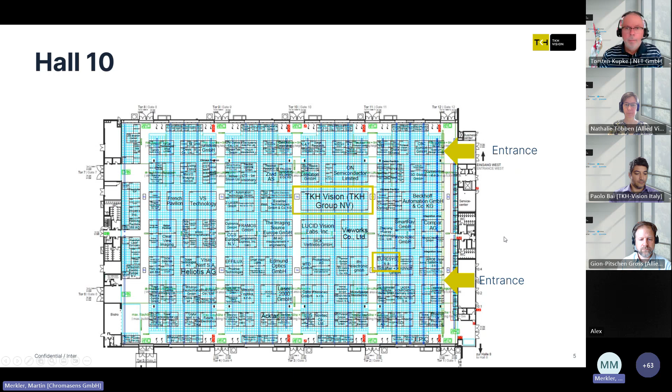As information, what we have in hall 8 - there are some other companies like Basler and Dalsa. The show tried to split the large companies in a quite similar way between both halls. What we also have in hall 8 is the Vision Days stage from the VDMA for the central presentations.

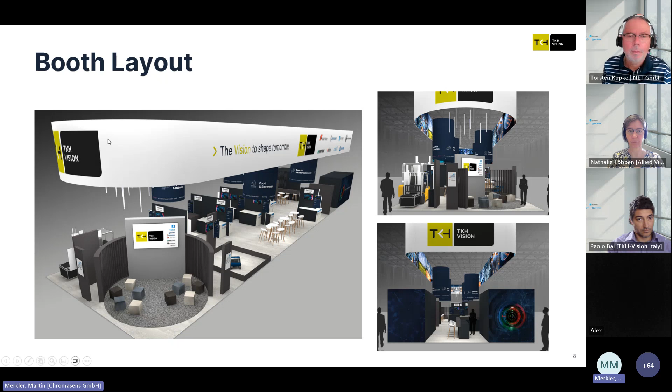What do we have on our booth? So here are first some impressions about the shape of the booth, about the color appearance. What you see here in front is a new thing we have this year - the first time we will have our own speakers corner on the booth, where we will have some really nice presentations. Nathalie will tell you something more later on. Please don't take care about the headline, because that visualization was done before we had the final headline for the show.

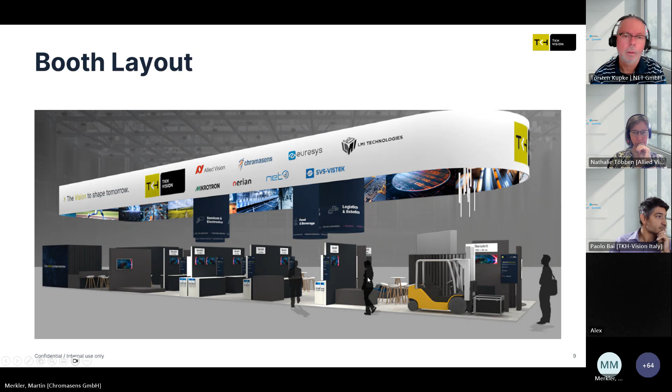Also some really nice eye-catcher demos, like the remote controlled forklift from the partner Enable, equipped with Allied cameras. And yeah, that's the shape of the booth.

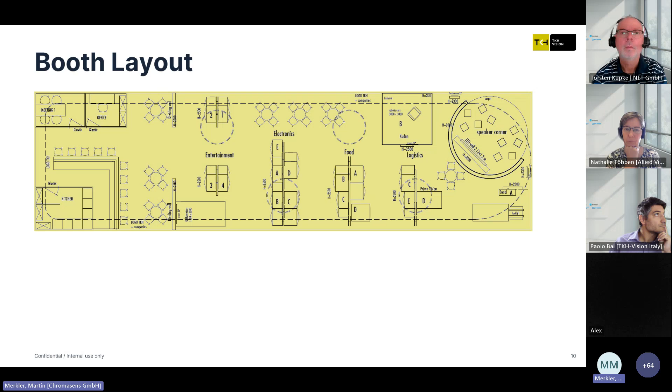On the right hand side we have the entrances from the hall, first beginning with the speakers corner. This time, as you remember, last years each company had its own tables and its own space. This time we changed to an approach organized by markets and segments - so we sorted what we want to provide not by the companies, but by the segments.

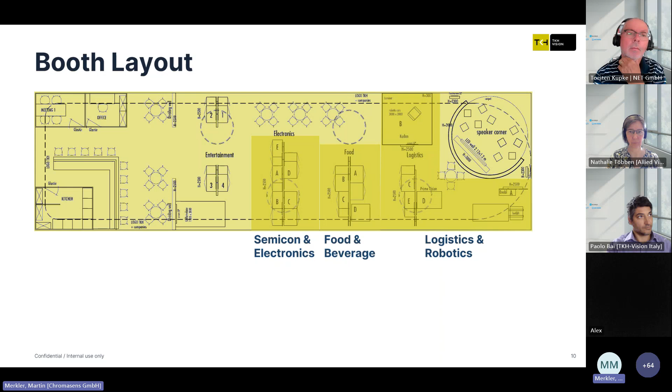For example, we are starting with logistics and robotics. The next segment we have is food and beverage. The third segment is semicon and electronics. And the last but not least segment is sports and entertainment.

On the sports and entertainment segment, we have also a really nice eye-catching - it's not a demo, it's a challenge for visitors - a golf challenge with a ball and holes, to have some fun putting.

And we have some special segments. We have the TKH Vision Solutions with an application sample we did the last years together within the group - a really challenging application. There we are showcasing what we can do together as a group, showing customers the advantages of a group and not only the single companies. Also what we have here is the TKH artificial intelligence demos, where we have integrated TKH AI solutions into the demos of the single companies.

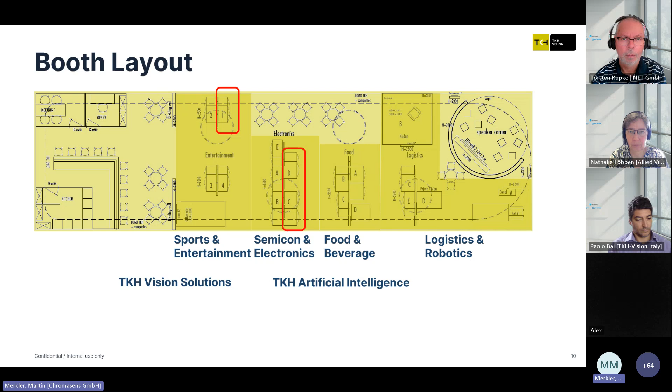That's the segments with the demos and the company. What we also have on the booth are 2 meeting rooms - small ones for approximately 4 people directly on the booth, and a larger room at the entrance of hall 10 for up to 12 to 14 people. We have a reservation list, so if you need a meeting room for you and your customers, please let the Vision Show team know. We will check what is available and do the reservation for you.

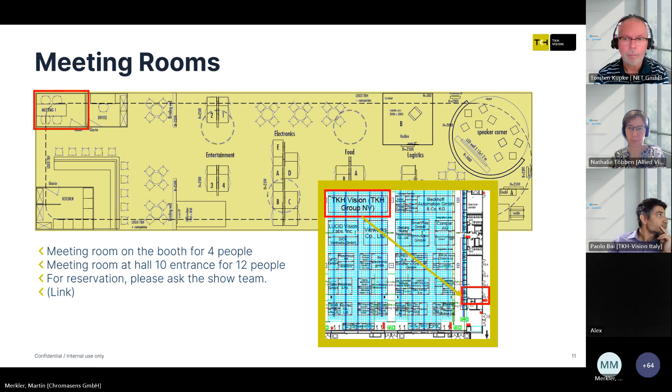Also quite important, infrastructure. We have a small office on the booth, intended for storing only the laptop bags, no regular luggage. We have a kitchen for the catering, and outside in the loading bay at gate 11, here is the TKH Vision booth, and here is the loading bay. At gate 11, we have an office container where we can store materials where we don't have the space on the booth.

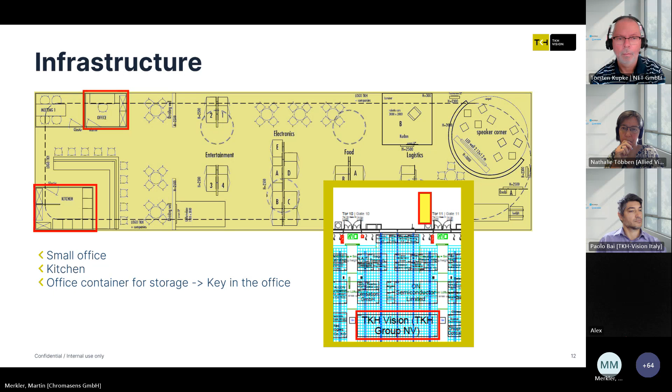And yeah, communication. Nathalie, now it's your turn.

That combines the communication with the booth design. The booth design really reflects very well our different levels of communication. Our communication approach, above all and most visible, is the TKH Vision level and message. Then the next level is the segments, the focus segments Martin has already shown, and typical applications for machine vision users. Then the next level is the brands, a member brand of TKH Vision.

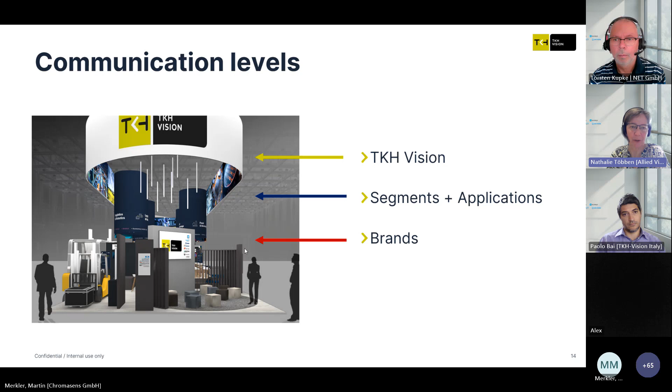Could you please go on, Martin? So that's the TKH Vision level, the message, and the new or actual slogan, United Power for Your Vision Solution. And the main message is that TKH Vision is really focusing on the customer and providing customer oriented vision-based 2D and 3D components and solutions.

It's not a new story, we just continue the story we've already started some years ago. So we still have the same key visual, and what is new is that all the OpCo logos don't have their own tagline anymore, but we have this general tagline, the TKH Vision brand. But as we are now shown together with TKH Vision, we will use the brand logos without the tagline. And for the first time, we will also have two new logos on our booth.

That is the TKH Vision Solutions logo and the TKH Artificial Intelligence logo on the demo desks in the area Martin has already shown.

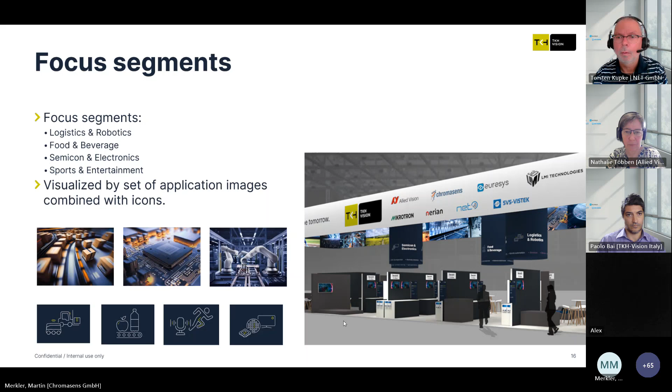We've also created icons for each segment, which are used on different spots on the booth. Then the next level, we've already seen that, is the repetition of the areas for the segments.

Next level is the applications. We want to highlight the type of applications we have, and they are very visible on the segment banner and on the demo desk, where we have a detailed explanation and description about what the demo is about, what application task is shown, and which company and which component is involved and integrated into this demo.

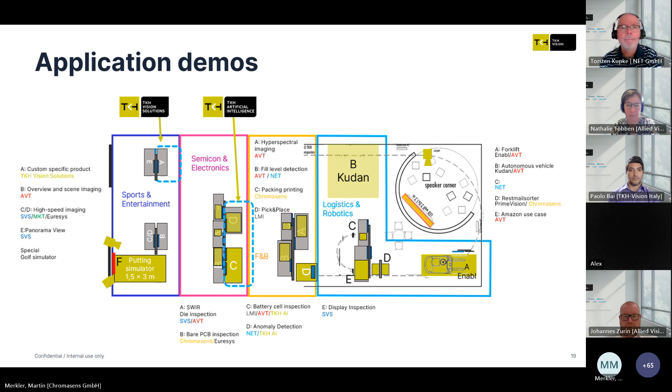There you can see the repetition of the demos for the segments, but you will learn more about this in detail tomorrow within the segment presentations. Here are some demo desk examples, how they would look like, but I think you will see more tomorrow.

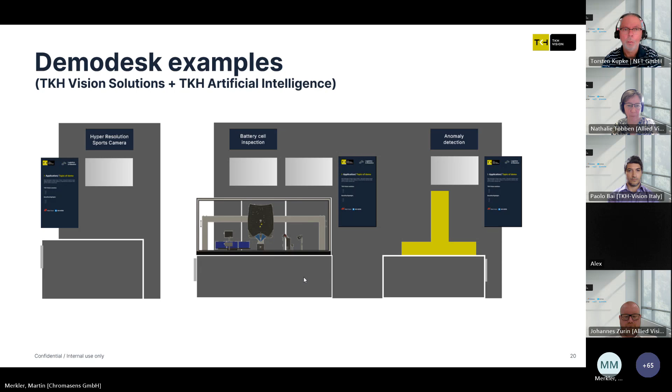And then we have our TKH Vision brands, and they are also still very present on our booth, on the banner, on the graphic panel for the demos where the OpCos are involved, on the speaker corner, so they are still quite visible on the booth.

So that's the first thing about the communication. Now some more practical, but quite important things: service and catering. We have some meeting areas where you can sit together with your visitors and customers. We have some high tables with chairs here at the demo segments, and we have the catering area also with the high tables, and a really nice large bar.

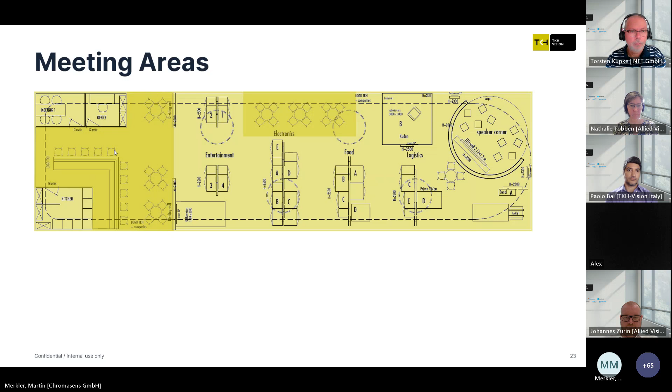And what do we have? Yes, we have a barista on the booth, the same as 2 years ago. On the image you see the son of him, he will be on our booth.

What do we have for food and drinks? We will have mineral water with and without gas, Coke, orange juice and apple juice. And for the evening, we will also have some beer, but it's the evening beer.

For food, we will have sandwiches, open sandwiches, and finger food with and without meat, some with fish, something for everyone. And we will also have 3 people from a service team who will help us provide the catering to you and your customers.

Yes, and also important, we have some rules you should take care about.

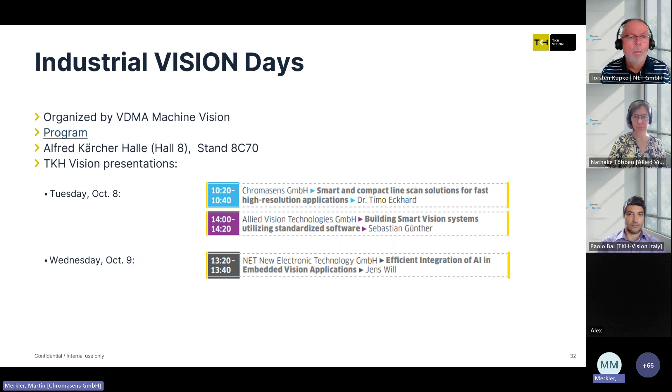Also organized by Ronald Müller, there are guided tours each day. We are part of this tour for the logistics segment, and on Tuesday and Thursday we are part of the electronics and semiconductor tours. There they offer guests taking part in the tour a breakfast, some introduction, and then tours through the different booths.

We should really take care to give a good presentation for these guided tours.

Oh, and a new thing on our own booth is the speakers corner. Nathalie, could you take over again?

We will have the speaker corner on the most important or most frequented side of the booth, and we put together quite an interesting and huge program with different speeches. We will start every day with a welcome to TKH Vision presentation. The idea is to have a kind of interview, not a pure presentation. We'll see the program in detail afterwards, but I want to highlight the keynote speeches. Every day after our break, we have a keynote.

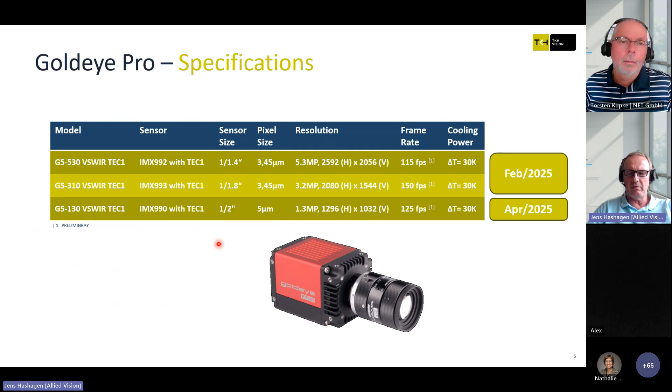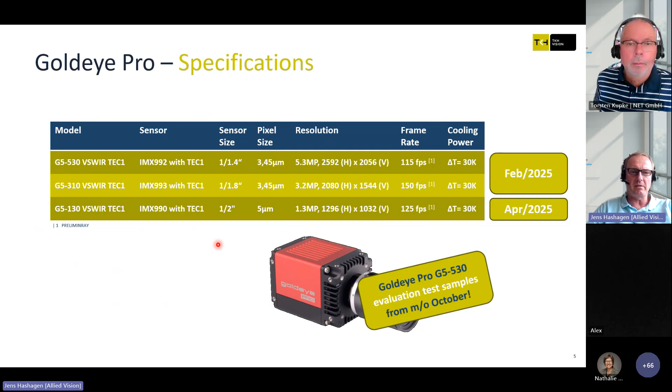This slide provides an overview of the already scheduled models. We start with the 5 and 3 megapixel cameras, which will be available or released in February. We will also integrate the first generation 1.3 megapixel sensor, released with a feature update in April next year. Right after the Vision Show, the first GoldEye Pro models with the 5 megapixel sensor will be available for customer testing.

A few words on the mechanics. As you can see here, the GoldEye Pro has more or less the same mechanical dimensions as the previous GoldEye, so 55 by 55 and a length of 78 millimeters in housing. The mounting holes are at the same positions, as well as the tripod adapter, which is on the bottom. This also ensures that replacement of GoldEye cameras by more modern GoldEye Pro cameras is easily possible.

A few changes we have here versus the GoldEye: the connectors are at different positions, as you can see here. The label is a little bit larger. The LED is at a different position, and the red part of the housing is a little bit lower than in the first generation. We have a flattened bottom here - you can see some ripples.

We made this flat because it provides, at the end, better heat dissipation when mounted to a solid metal part. The ring, which is not visible here, is now blackened because we figured out that there might be some reflections caused by the standard mount we have here. Here it was not visible because the sensor is smaller, but for larger sensors you can get reflections, and that's why we blackened this one. So there are some minor changes between these cameras, but in general they look the same.

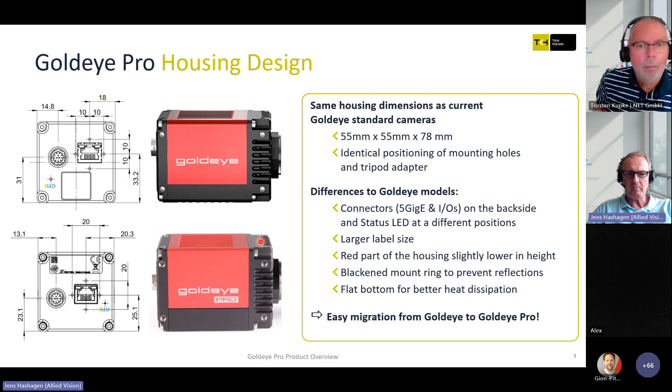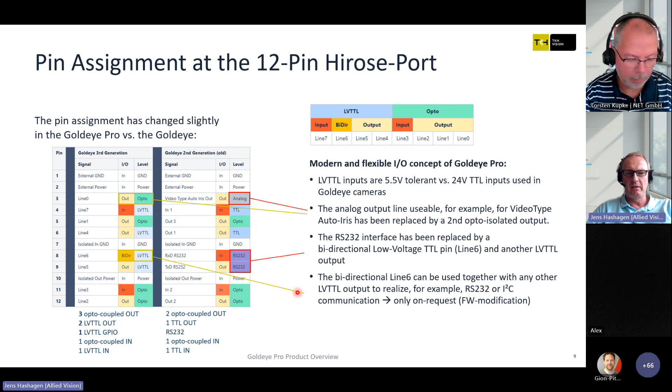I/O control wise, we also made a few changes. We replaced the analog output by an opto-coupled output, and in general we changed the TTL level from standard TTL to low voltage TTL, and the RS-232 port was replaced by a bidirectional low voltage TTL and a standard low voltage TTL output. With this, we have on the one hand more I/O capabilities, and also the flexibility to provide later, with firmware updates, RS-232 or I2C communication if the customer wants to have this.

For the TEC version, we already have the FXO available, and the GoldEye Pro is, as I already mentioned, coming next year, beginning of next year. One thing I would like to point out is that these sensors do not only have high resolution, they also have high frame rates, and thereby high bandwidth. So interfaces for these cameras are either 5 GigE or CoaXPress 6, or even 10 GigE and CoaXPress 12, like we have it in the FXO.

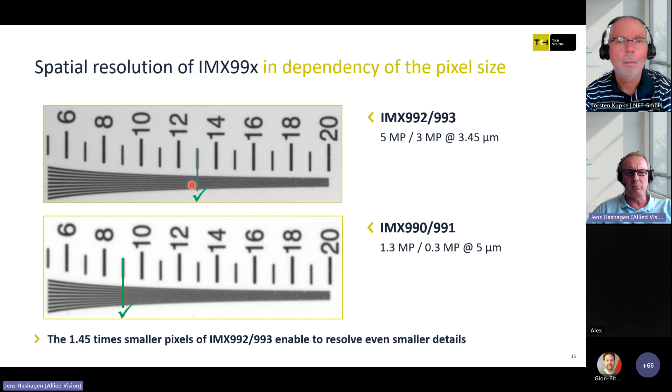Having a quick look at the cooling, Goldeye Pro cameras come with cooling, similar to the FXO, with thermoelectric cooling. If you operate the sensor in a TEC-less version, you typically have temperatures of 45 degrees, and you see some defective and non-uniform pixels, especially for long exposure times. The lower you get with the temperature, the better the imaging performance gets, so cooling has a big benefit on the imaging performance.

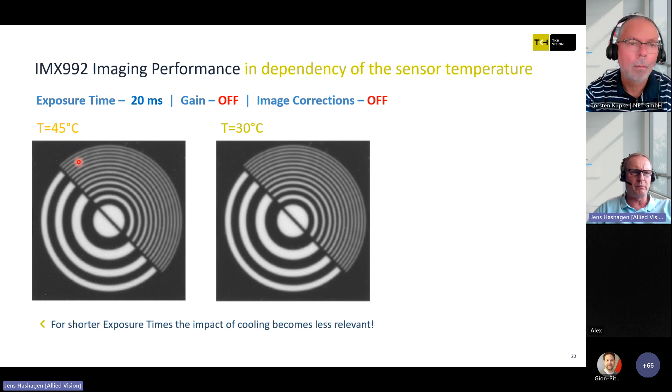But if you have shorter exposure times, this impact becomes less and less. So even at 45 degrees, the image looks quite homogeneous. But for longer exposure times, defect pixel correction and especially non-uniformity correction is helpful, as you can see here.

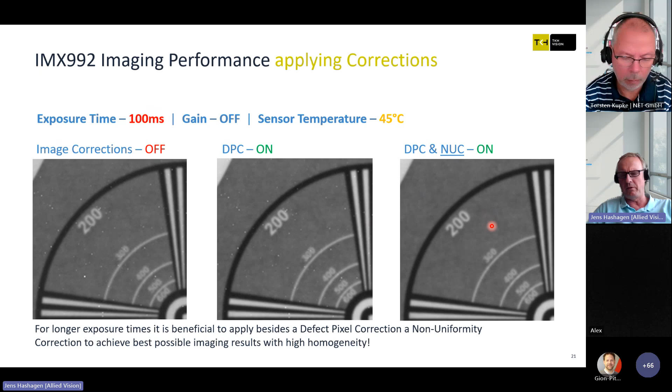Without any corrections, you see some defect pixels and non-uniform pixels, but with DPC and NUC, you get a really nice looking image. In general, the Sony sensors have a natively high uniformity with a low number of defect pixels. That's why you can use the TEC-less sensors also in very compact housings like the Alvium cameras, but also the FXO and EXO camera series.

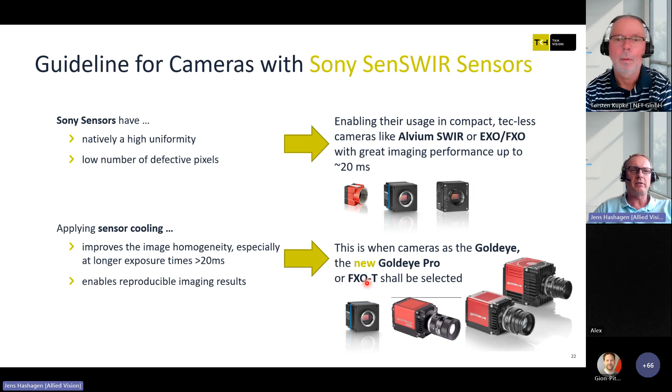But if you would like to have reproducible imaging results and require longer exposure times, then Goldeye Pro and the FXO with TEC cooling should be selected.

And now finally the application. As these sensors have very high resolutions and also relatively small pixels, they are ideally suited, and we see this already by the customers who ask for this. It's definitely very well suitable for semiconductor inspections, but due to the high frame rates and high resolutions, it's also possible to use these sensors in spectral imaging applications.

For multispectral imaging applications, people like to put filters on different pixels or micro lenses, and with a higher resolution, this provides resulting high resolutions for snapshot imaging. This can then be used in many interesting applications like precision farming, agriculture, recycling, or even medical imaging for cancer detection.

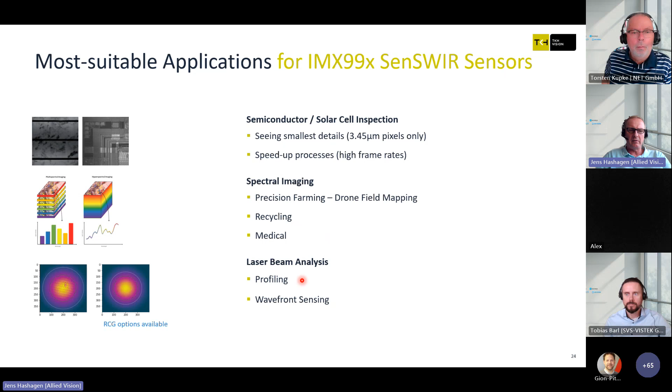Another important field is laser beam profiling and wavefront sensing. The sensors are larger, so you can inspect larger lasers, but we also offer these sensors in a TEC-less version. You can see here with an RCG version, with removed cover glass, the image looks much better because you don't have these image artifacts caused by the coherent light of the lasers.

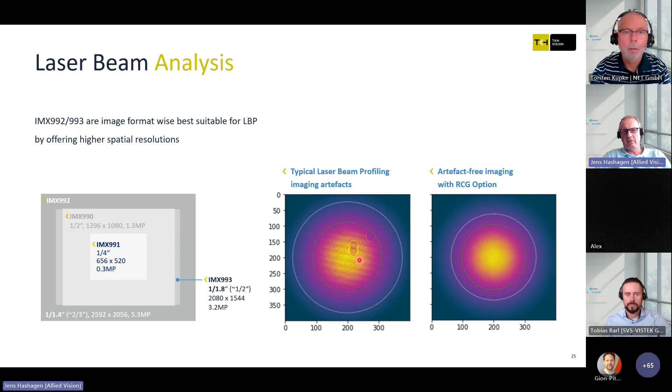Overall, this provides us a great portfolio for SWIR imaging with the latest sensor technology, and I'm very excited about having this new Goldeye Pro camera series also in our portfolio, which over time will also be extended by additional sensors and additional interfaces. So that's it in a short time frame.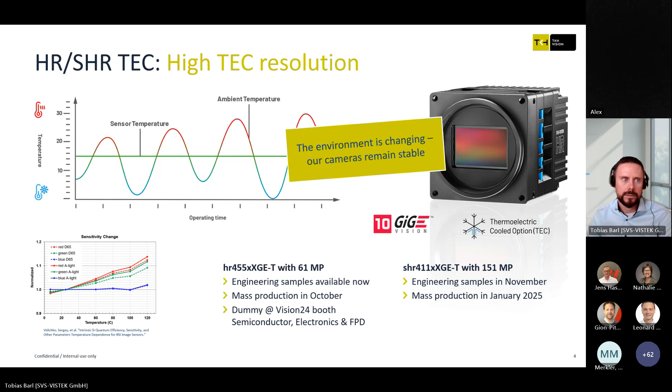Continuing with increases in resolution, I also wanted to highlight that the SHR cameras have had their resolution increased, as Jens showed in his presentation. With the second generation of SHR sensors from Sony, we now have 4 times the resolution, which can be used to inspect more at once or capture more detail. This camera is already available and will be shown in a demo case in the semicon and electronics part of the Vision booth. I'm sure Yvon will show more details tomorrow in his presentation.

Another resolution increase, this time only in the horizontal direction, is the upcoming EXO and FXO 901 cameras, with an ultra-wide sensor of 2000 by 8000 pixels. The idea is that whenever multiple cameras were needed to cover an application's scan area, they can now be replaced by a single camera with equivalent coverage, lowering system cost and simplifying machine vision processing.

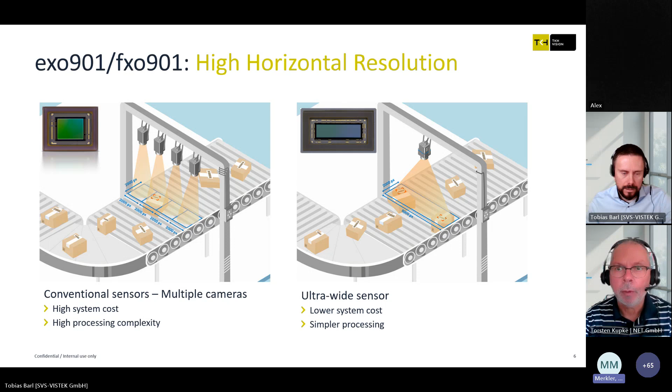For the temporal part, just a minute or two—we also saw in Jens' presentation that the FXO now offers cameras up to 24.6 megapixels at very high frame rates, and the team is working on RDMA and RoCE v2 support to make the system even more efficient. We also have the FXO with 2 lanes of CoaXPress 12, providing more speed at the same resolution, which will also be demoed at the Vision booth.

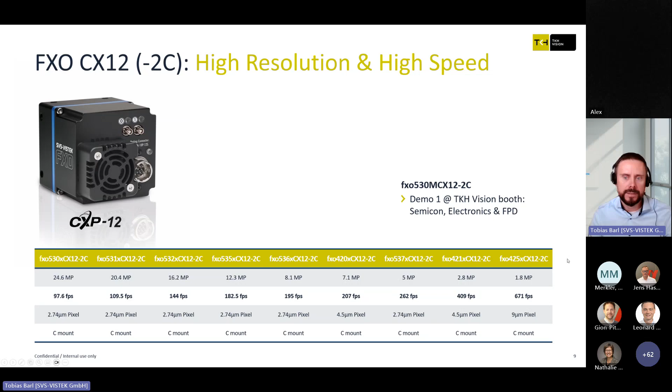And talking about real high-speed cameras, the eoSens 9.5 combines a very large 6.5 micron pixel with very high speed—more than 500 frames per second at maximum resolution. Lowering the ROI can push it to 225,000 frames per second, useful for motion analysis, laser triangulation, and line profiling.

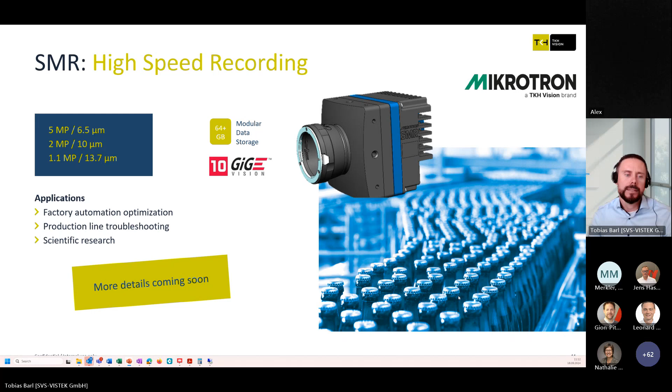Lastly, also in the works is our recording camera, providing 64 gigabytes of storage, modular so you can add more 64 gigabyte slices if you need more storage. More details are coming soon—looking forward to presenting that.

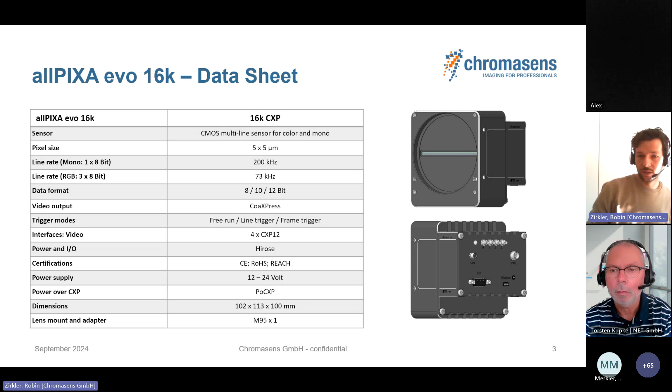So what is special and unique on this camera? It's a 16K camera. You can choose between RGB, so three lines RGB, or 4 lines, so RGB plus mono, so you can read out all these lines in one acquisition, in one frame.

What's really special and the USP on this camera is shown on the right side. We have shifted mono lines, so we have 4 mono lines which are shifted by 0.5 or 0.25 pixel to each other. So we can calculate a high resolution 32K image out of this camera. The customer is really flexible, so they can choose between 16K mono, RGB, or 32K resolution.

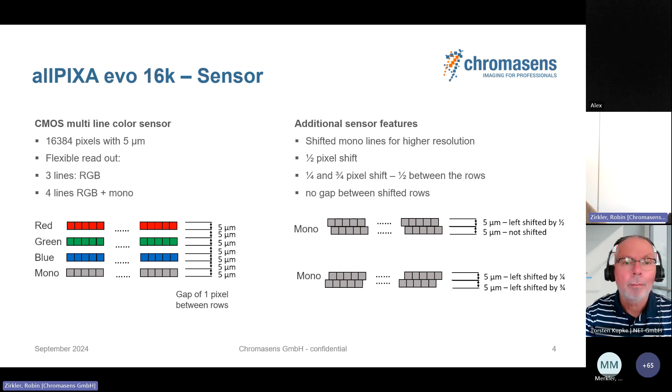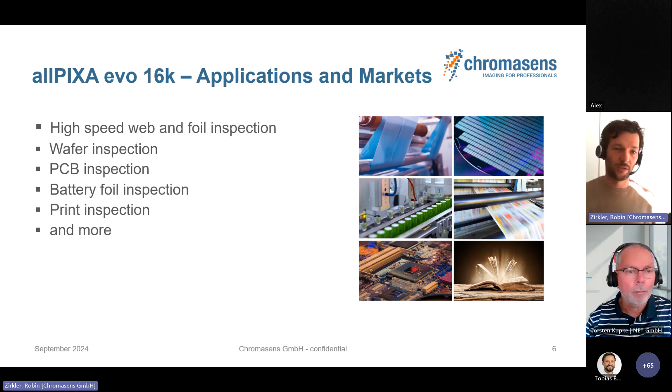To speed up, what are the applications and markets? It's mostly for high-speed web inspection, foil inspection, wafer inspection. We will also show a demo at the show. PCB inspection, battery foil inspection, print inspection - all for high resolution and really high speed acquisitions.

This camera is really nice. This is an advantage of this allPIXA evo 16k, the new sensor, high sensitivity, RGB plus mono. Then we have the shifted mono lines for special applications. We have the flexible interface in X, Y, Z direction. We have Power over CoaXPress capability, trigger over CoaXPress, high line rates for mono and color, and it's really flexible with different frame grabbers.

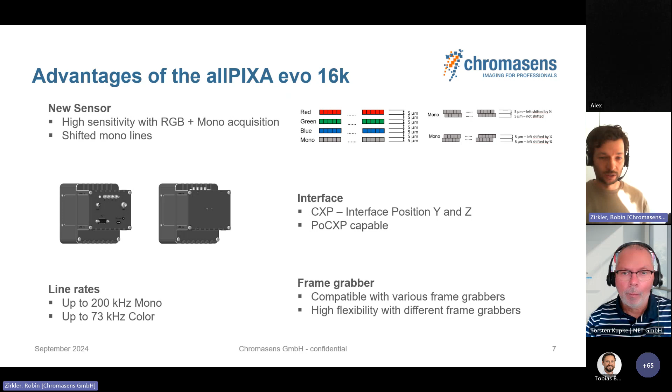One advantage of this camera, where we've improved a lot, is the usability. We have intuitive camera operation software where you can configure the camera, calibrate the camera, do all this stuff, analyze the images - histogram, line plot, everything is available.

We have online documentation for the camera and the software, with online videos, tutorials, step-by-step introductions on how to calibrate the camera and how to work with the camera.

We also have a line scan vision platform, a scalable platform. So if the customer needs 1 camera or 6 cameras, we have this platform where you can design the camera into a compact housing with camera and lights.

Especially for high resolution, it's really hard for the customer to set up and align the camera, because if you have an optical resolution of 5 micrometer or 8 micrometer, it's really hard to align the line scan camera because you only have 1 line.

We have this alignment adapter where you can mount the camera on it. You place a ruler under the camera, and then you have a cockpit in our GCD tool where you can see the alignment of the camera. We have screws on the adapter so you can adjust the position of the camera and the line. It's easy to use and improves the usability of the camera, reducing the setup time of the system.

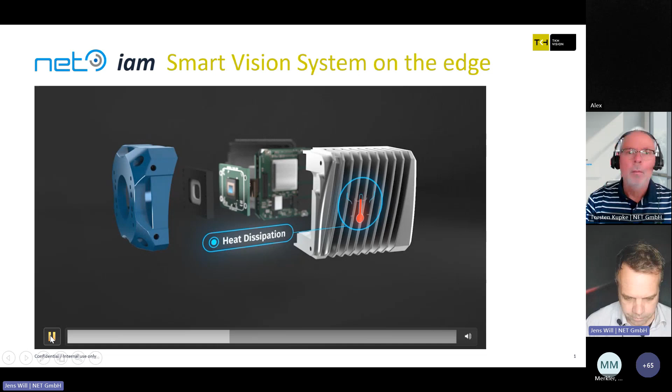So let's have a look inside. Here we've got the edge device. We have an ARM processor that does all the calculations in combination with an FPGA processor. This means the whole artificial intelligence is done inside the camera. This development is key for artificial intelligence use for our customers. We don't need any space in the electrical cabinet for a PC, it's all done inside the iam camera.

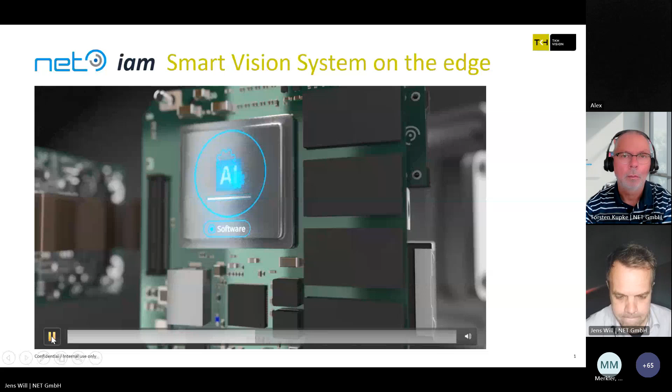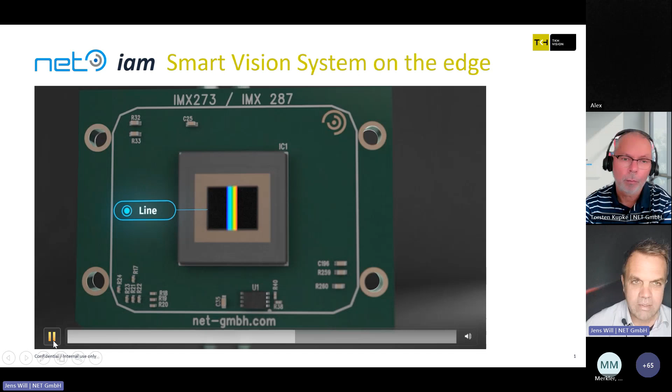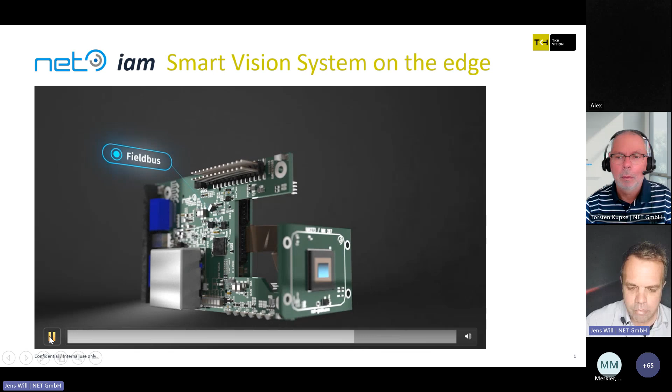We have a lot of sensors inside, whatever the customer needs. We have very fast VGA sensors, but also high resolution sensors inside. We can do line scan, matrix, also NIR shortwave infrared, whatever the customer is in need of. Multi-sensor is also possible for 3D solutions. We have several bus systems on a carrier board, also as necessary for the customer. And we are IP67 proof, so waterproof, dust proof, everything can be integrated in the iam.

So let's find out what our new customers will need at the trade fair. Just to highlight: fast to high resolution matrix sensors, CPU, FPGA processor, powerful image processing, artificial intelligence, open camera concept, whatever our customer needs we can fulfill the mission. With a fanless design, we are IP67 proof. I hope this gives you a short introduction of the NET camera system, and I hope it could help you catch up some time. Thank you for your time.

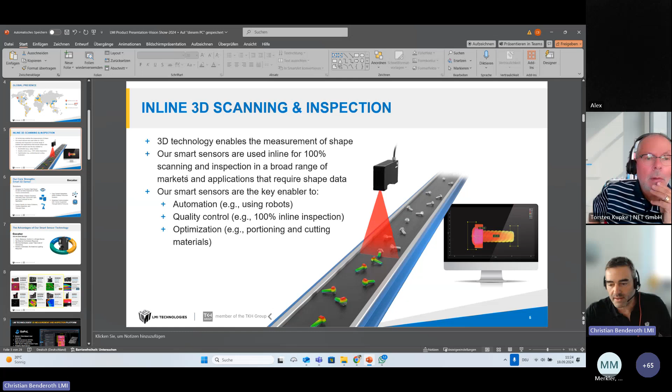All we're doing is about 3D technology. We're very focused on 3D technology, and we use these sensors for automation, quality control and optimization. Our core strength in terms of smart 3D sensors is that we create solutions. Our sensors come with embedded software, so it's more than just a component as a 3D hardware sensor, it's already part of the solution as the software is on board. These devices are designed for high precision speed, 2D and 3D inline inspection, even in very rough environments.

So we're using our sensors also in sawmills. They all come with an IP67 housing, as mentioned also by the guys before, so they are very robust. We offer a very wide range of solutions, so we have different technologies which I'm going to present now: laser line profiling, structured light, and line confocal.

These sensors come in a very wide range, from a very small field of view of about 14 millimeters up to 2 meter field of view. Speed is up to 10 kilohertz. When we narrow down the field of view with a laser line profiler, we can go even higher.

We go up to 18 to 20 kilohertz, so they are quite fast. We have robot interfaces - we are a partner of the Universal Robots Plus program, where we have a plug-in so our sensors, either line sensors or structured light, work with Universal Robots plug and play. We also have interfaces into all other major brands like KUKA, ABB, Yaskawa, Fanuc, or whatever they are.

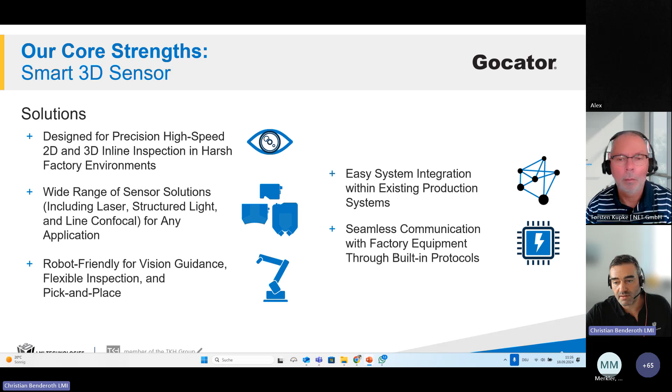One of the highlights is definitely that the integration of our sensors with the standard interfaces is very easy, and we offer seamless communication with the factory equipment on the floor. So as mentioned, the Gocator is a smart sensor.

The software is embedded. One of the new features we are showing - we're not showing any new sensor at the show, but we have the design and strategy of the GoPxL software, which is our new platform in order to run, scan, measure, and control with the sensors all on a single device. It supports both 2D and 3D, which we'll see later on.

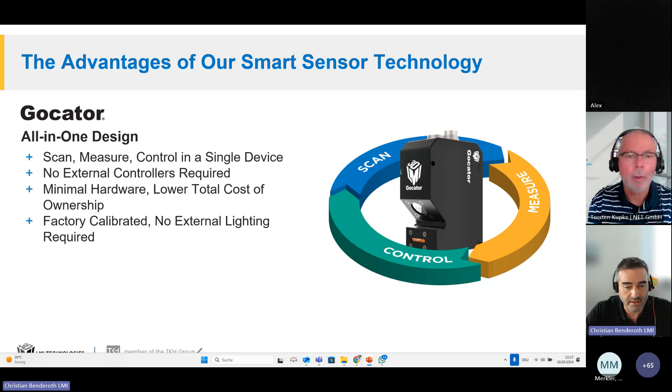All our sensors are factory calibrated, so there is no external lighting that needs to be calibrated into a sensor or into the solution. They are all calibrated and no calibration is required.

We have a pretty wide range of sensors, as mentioned before - laser line, which is all these ones in the yellow boxes. They start with standard sensors, the G2100. Then we have the G2500, which is more the high resolution and high-speed camera, going up to 18 kilohertz as mentioned before. Then we have the G2600, the high resolution sensor, which comes with a 4K resolution line.

And we have the G5000, which is our confocal, and the G3000, which is our snapshot sensor. The older ones are just the single point or displacement sensors, called the G1000. Last but not least, we have a product range called the G200, which is very dedicated to a specific industry - the wood industry.

Mentioned before, the highlight is the GoPxL. GoPxL is our new modern platform for the usability of 2D and 3D measurement capabilities and cameras. This is a very modern web-based user interface, so you can have access to that software just by entering the IP address into any browser - it doesn't matter which browser you're using.

It has a very powerful multi-sensor networking capability. So if you want to combine different sensors into a complete point cloud, and connect also the coordinate field, that is all prepared in the software. It comes with more than 160 built-in measurement tools that you can use, with different types of alignment, filtering, and blob tools - a very complete set of tools you can use in the 2D and 3D space.

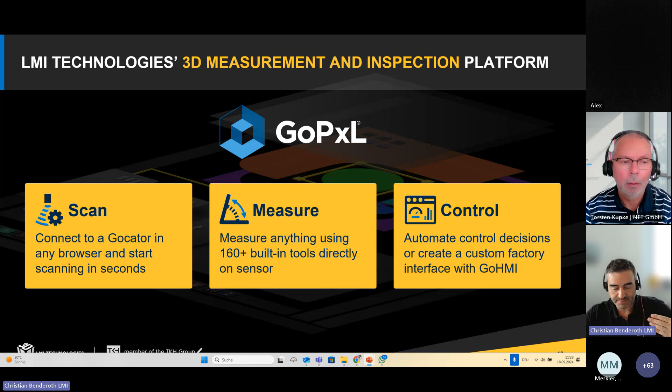As mentioned before, it enables you to scan by connecting the Gocator with any browser. You can do all the measurements, take all the information and data, and start working with them using these 160 built-in tools. You also can have full control of a sensor, build your own HMI with the HMI builder, and there is direct connection or direct interfaces into any PLC for direct control.

What are we showing now on the booth at the Vision Show in Stuttgart? We are showing our laser triangulation sensor - that's the Gocator 2000 family. I'm pretty sure you know the principle: you have a laser and a camera, and there is an angle between them.

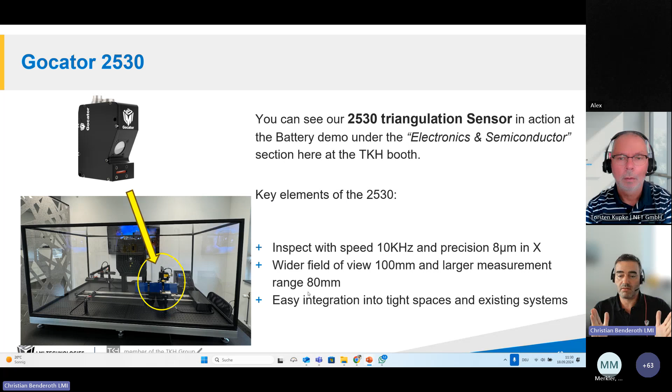It's calibrated, and we see our Gocator 2530 on the demo here in the small yellow box - it's a battery scanning demo. The 2530 is one of our high-speed sensors, with a minimum of 10 kilohertz and a precision of 8 microns in X. It has a wide field of about 100 millimeters with a measurement range of about 80 millimeters.

These sensors are used in a very broad or wide field in the industrial space for quality control - 100% inline inspection. It can be any part - it can be food inspection, it can be battery inspection.

Next sensor is the Gocator 3000, our snapshot sensor. Here there's no need for movement in order to take a 3D point cloud.

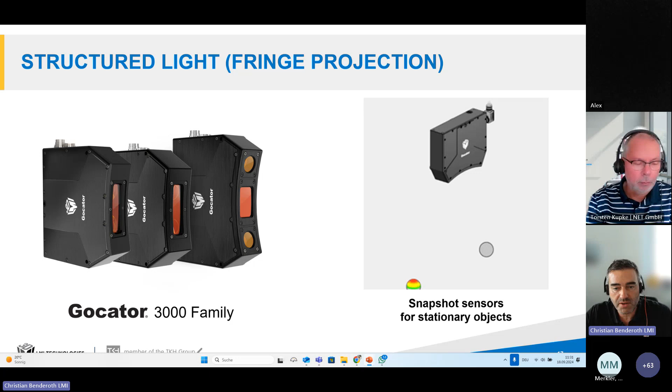We offer these sensors in 3 various fields, from small fields like 40 by 50 millimeters up to the larger field, which is the 3520 we are showing here. The resolution is in the range of 4.6 micrometer repeatability, and the field of view is up to 280 by 175 millimeters at a clearance distance of about 200 millimeters.

We can reach up to 7 Hertz scanning speed with full data acquisition and calculation. The sensor also comes in an industrial design with an IP67 housing.

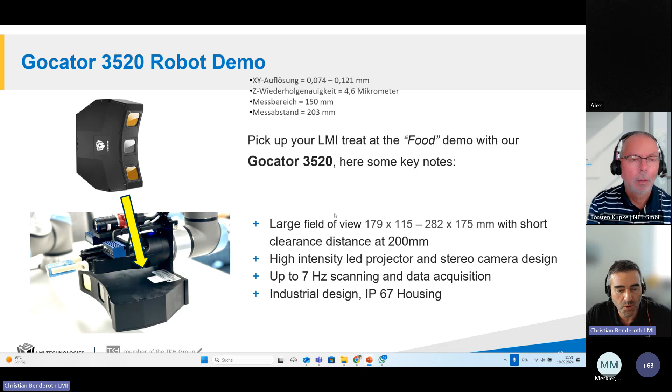This is how the sensor is used also here on a universal robot, connected with 2D features on the show. We are using these sensors for static measurements, small field measurements, and inline inspection of controller boards and PCBs, among other things.

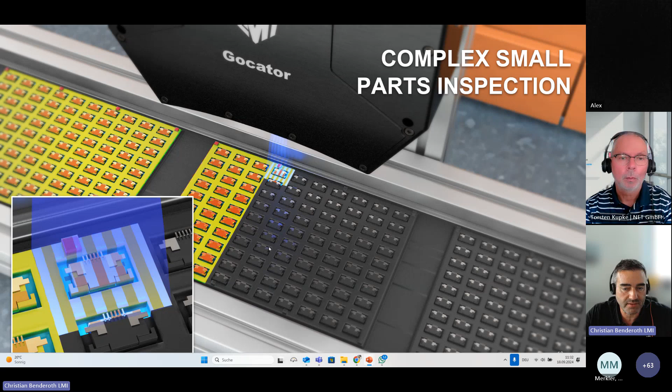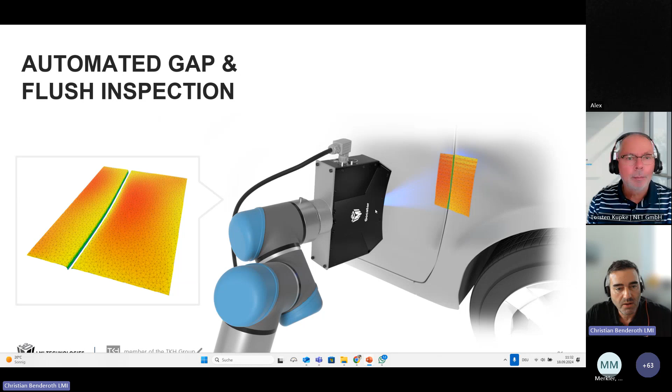Last but not least, we also show the Gocator confocal sensor. The confocal technology is one we acquired from the company FocalSpec in 2019. This is a very special technology, as it's not triangulation based, it's a real confocal, or chromatic confocal, with a special ability to scan transparent material, glass, and high glossy materials.

These sensors can do measurements on surfaces that have never been scanned with a standard line profiler or snapshot sensor. This demo is built into our battery scanning demo, where we scan very thin lines or fine defects on the top surface of a battery. We are using the model 5516.

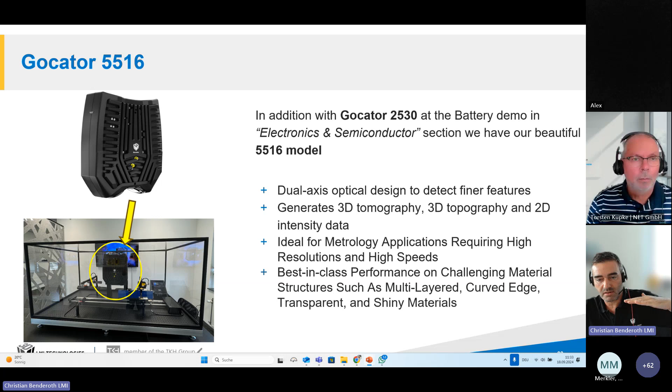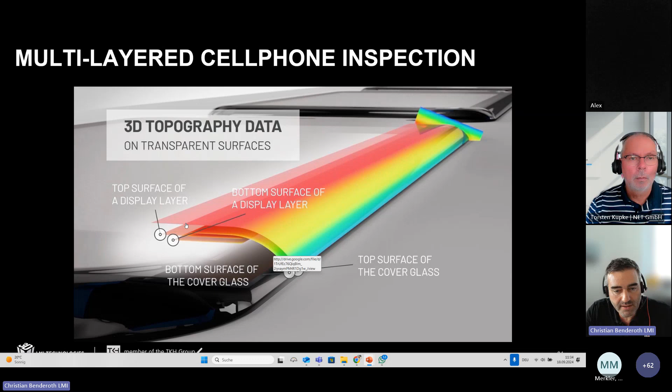We have 3 different models of the Gocator line chromatic confocal, with a field of view between 4 and 16 millimeters. These sensors can generate 3D topography and 2D intensity data. It means if we have several surfaces of transparent material, we can scan each of these surfaces and evaluate, as shown here on 3D topography data for a glass surface of a mobile phone. We have this curved phone glass, and we can scan each layer of the glass.

Yes, yeah, okay. Christian, yeah, how far are you? Because we have to look for the time.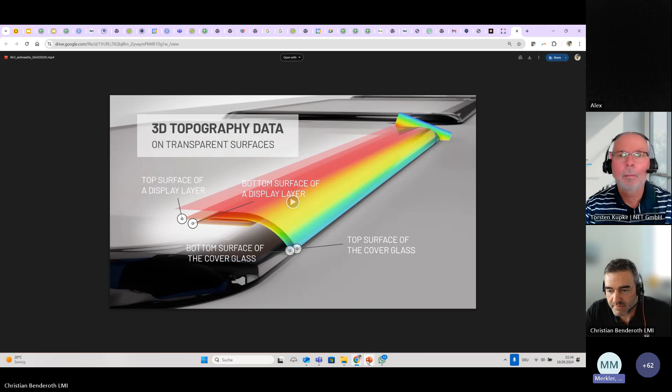I'm good, so that's just one more application, as we see all the layers.

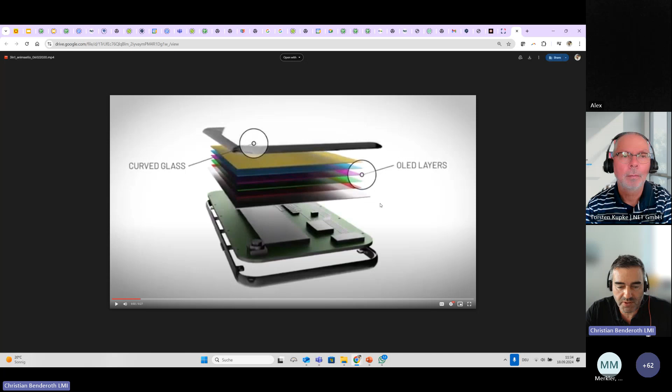And that's it for my presentation. Thank you. Okay, thank you.

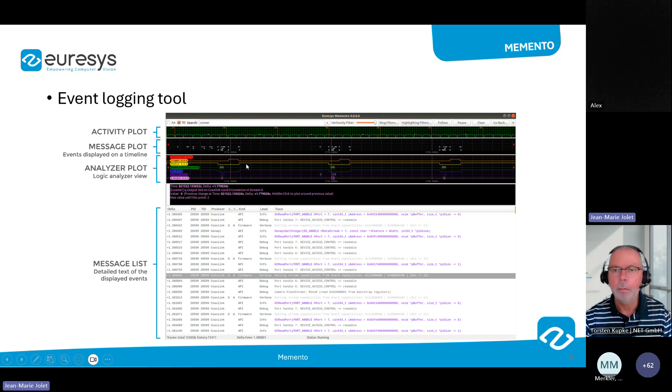Another very interesting feature of this Coaxlink Quad CXP-12 frame grabber is custom logic. Custom logic is a framework which allows our customer to integrate, to implement their own algorithm directly inside the FPGA

of our boards. This can be very useful, of course, to pre-process the image before the transfer to the PC memory. This feature is absolutely free.

Compared to some of our competitors, who will have, let's say, paid add-ons, this custom logic is absolutely free. There is no license related to the usage of custom logic.

Another frame grabber is the Coaxlink Quad CXP-12 Value. It will be used in the electronic and semicon demo developed in collaboration with SV Stack.

This frame grabber has exactly the same features as the Coaxlink Quad CXP-12, except that it does not support custom logic. The FPGA is a bit smaller, we have fewer resources, so in this case custom logic is not available.

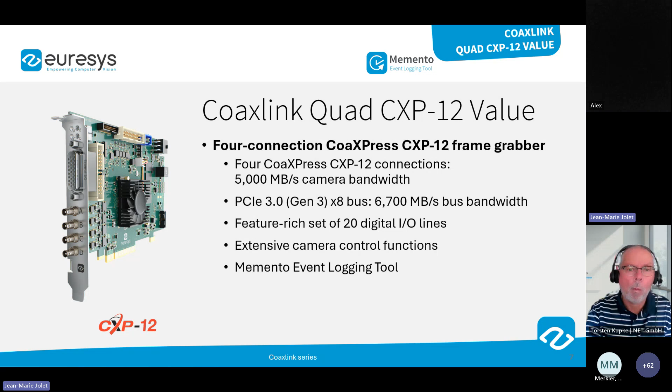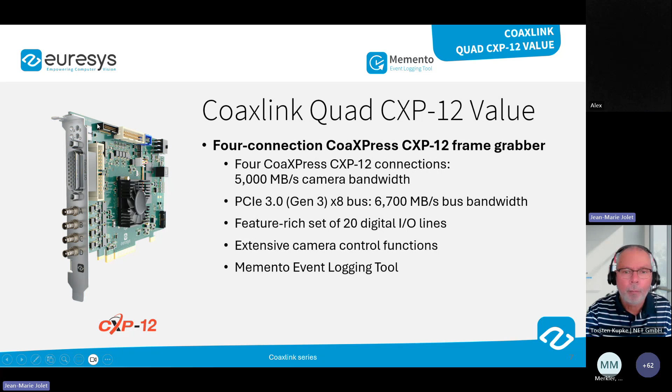Remember that both cards feature 20 digital I/O lines available here and here, but we have an additional I/O connector, which is this one. It's called the extension I/O, to which you can connect this module, and this module will add 20 TTL input

lines or output lines, or 10 RS422 lines. So you can combine them differently. For instance, you can specify that you only want 16 TTL inputs, and then you have 2 RS422 connections.

So it's up to you to configure the system. It's pretty flexible, actually. The TTL lines have a frequency up to 1 MHz, and the RS422 has a frequency up to 10 MHz. There is also another connector.

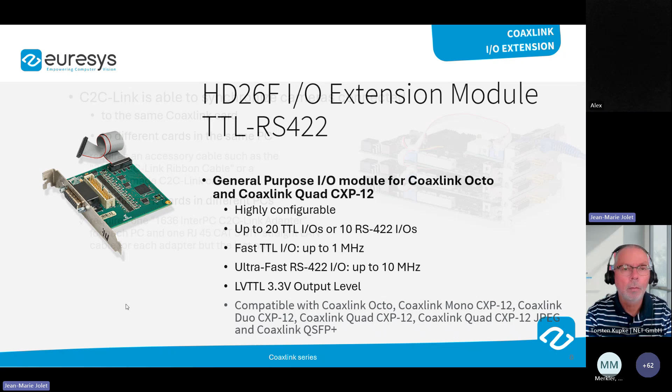Maybe you have noticed this blue connector. This blue connector is called the C2C-Link connector. C2C-Link allows you to synchronize several cameras that are connected to the frame grabbers, or using the C2C-Link connector, you can

connect, using flat cables, several boards together in the same PC, and then you can connect all of them, and synchronize all the cameras that are connected to this frame grabber in the same PC.

It is also possible, thanks to C2C-Link, to synchronize cameras that are connected to different frame grabbers in different PCs. In this case, you use this device, which is called an inter-PC C2C-Link adapter. In this case, everybody will be synchronized.

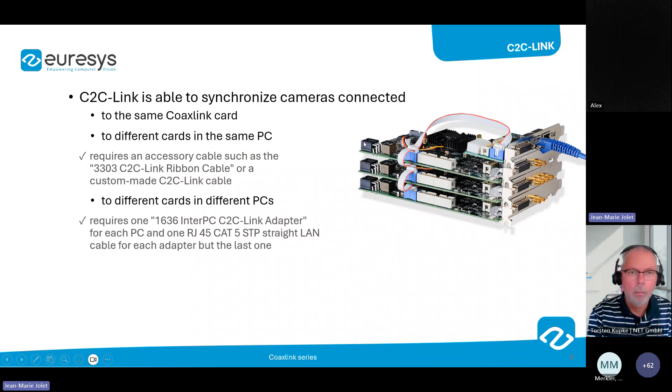So this is it for the frame grabber. We are also involved in the demonstration for logistics, the Amazon case developed by Allied Vision with Open eVision.

Open eVision is our set of image processing libraries that are dedicated to the development of applications in the machine vision industry for 2D, for 3D, and for deep learning based applications.

The word 'open' in Open eVision means that we are open to any image acquisition technology. So it doesn't matter whether the image has been acquired by a GigE Vision camera, by a USB3 camera, by a frame grabber, even a frame grabber from the competition.

As long as you can provide a pointer to the memory buffer where the image has been stored, then this image can be processed by Open eVision.

So to integrate our libraries into the customer application, we provide 64-bit C++ classes, .NET assembly, as well as Python bindings.

Open eVision supports Windows as well as Linux, and it can also operate on ARM platforms, so embedded platforms.

So the library that will be used in this Amazon case demo is EasyBarcode. EasyBarcode can detect automatically one or several barcodes in an image, and identify automatically what is the symbology.

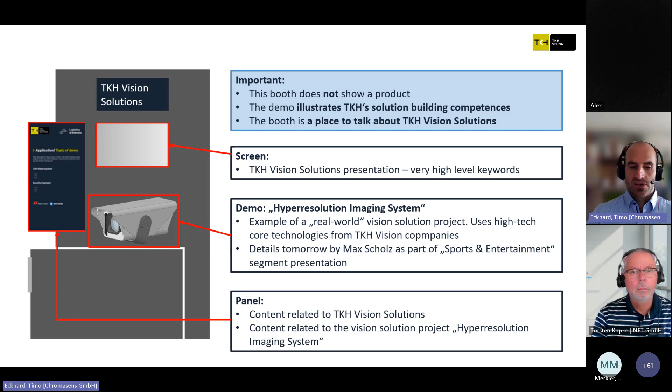Okay, so now let's walk through the TKH Vision Solutions elevator pitch. The idea is that whenever customers or interested people come to you, you should survive the first 5 minutes explaining the concept, explaining the brand, explaining the idea behind it. And when it gets technical or more detailed, you can address the customer, or link them to, for instance, me.

So the elevator pitch presentation starts with who we are. What we typically explain is we start on the group level - I don't need to go into details here, I'm just telling you how I would pitch that - telling about TKH Group, then the different segments of TKH Vision, where we are in the Smart Vision segment, and then introducing TKH Vision as a subgroup with its individual OpCos.

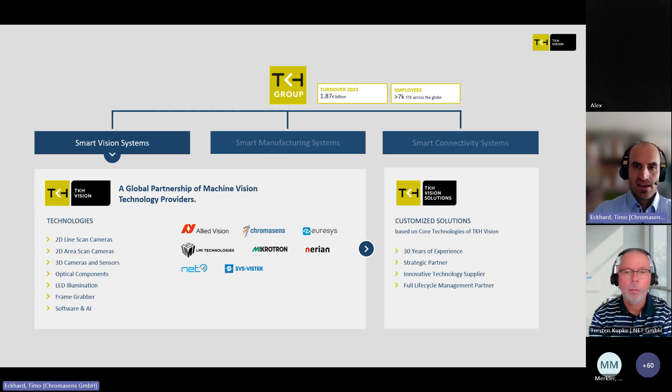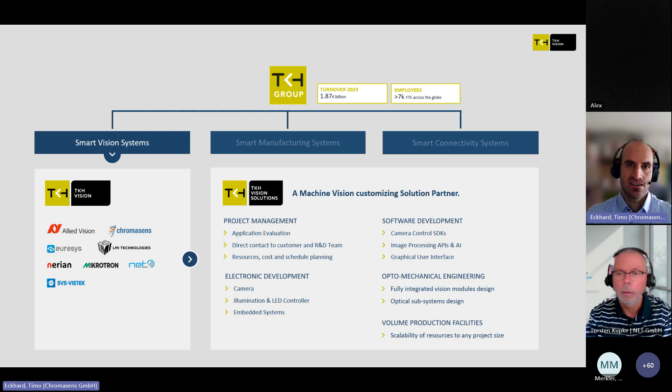After that, we'd talk about TKH Vision Solutions, and essentially that this is a machine vision customizing solution partner that has a certain set of competences needed in this business, like project management and all the engineering and operation disciplines needed for building solutions.

The next part, what we do, is related to the design services involved in designing and developing vision solutions from the start point, from the idea up to product volume production.

There's nothing new for you here. You'd introduce the technologies offered by the individual OpCos. The idea is to show there's a large portfolio of standard products, and that the solution building we do can make use of all the core technologies found within those products - to show that we have competences over this wide range of technologies used in the product.

And what we learned in the past is that the important things for our customers when it comes to solutions are, on one hand, technological aspects like in-house competences, but on the other hand, it's also all about the operational part of doing business with the customers.

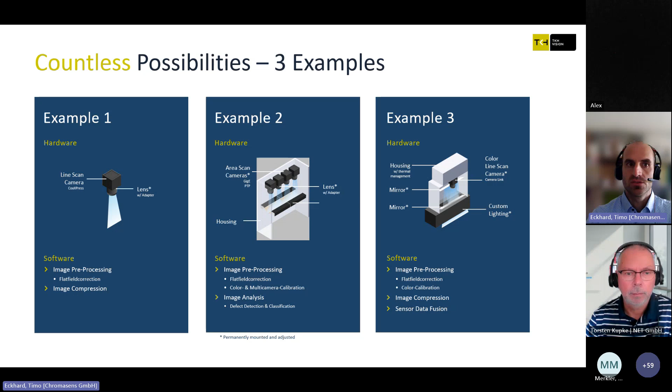Maybe a last thing to add is it happens often that customers approach us with something they believe is sort of a solution project. In the end it turns out it's a component business, and it is considered by us as a conventional component business. On the other hand, a customer might ask you for a specific component, and you find out with the customer that actually he needs a little bit more, and you end up talking, for instance, to us about potential solutions that could fit the customer's needs. So it can go in different directions.